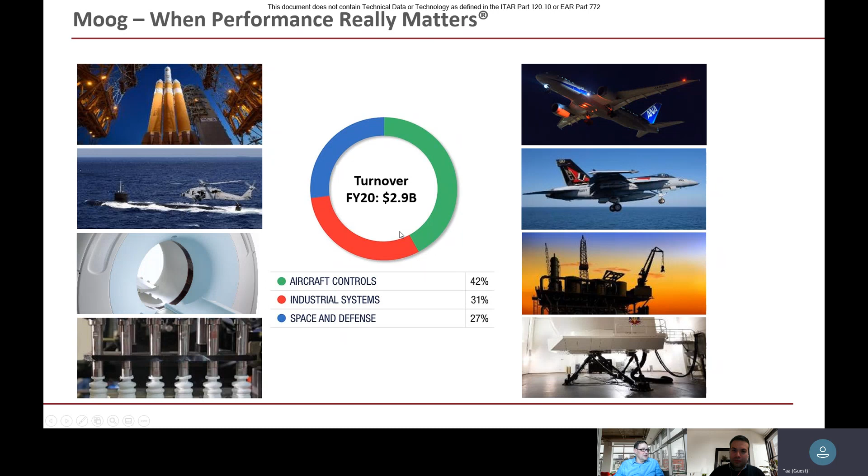So Francesco, why don't we introduce ourselves? Probably you would like to start. Yeah, definitely. Francesco Mazza, Business Development Manager for the Growth and Innovation team here in Europe. I'm an engineer, mechanical engineer, even though I've spent all my career more in business development.

In different sectors, I started with automotive and then moved to energy, renewable resources, and now more in motion control. I've been working in Europe in different countries - I'm Italian, but I live in the Netherlands. I had considerable long experience abroad of Europe too, in South Africa. If you look at my career, I started more as a sales engineer, then moved to product manager, and then to business development manager.

Ari, you want to tell us something more about you? For sure. So my name is Ari Almqvist. I'm the Group Vice President, and nowadays the Director of Growth and Innovation. I've been at Moog more than 30 years in different roles, starting in Finland. I've been in Europe in different roles and locations, basically Germany and the Netherlands, and the last 7 years I've been working in the US. My background is automotive engineering, I also have some education in aircraft business, plus some business education in addition to my engineering background.

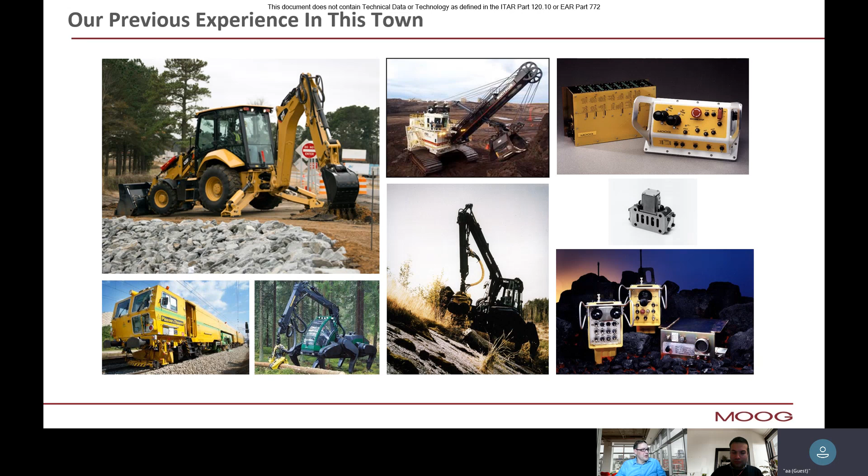Some of these machines are automated, some are pretty futuristic, some are quite high productive, and some are remote controlled. If I take my own working experience in Moog, when I started in Finland, I probably spent 70% of my time in mobile equipment, so that was the biggest market for me at that stage. So it is not that we are completely new, though I'm sure we are bringing some new experiences to this market. So next let's talk a little bit about our vision and the road to 2040.

Until now we've talked quite a lot today about energy efficiency and electric systems. We probably have tens of thousands of these systems made already, which we are showing some examples of today. Francesco, why don't you talk about what's going on now in automation and electrification, just so we show we're really working on the vision. It's not just sitting and dreaming, we are doing real work, trying to get our feet on the ground.

First of all, on the electrification side, we are working on making machines electric. Our goal is to even check the possibilities of full electric machines, so not only electric powertrains but also electric actuation systems, in order to improve the performance of the vehicle and decrease the energy consumed.

We are already developing several prototypes and some pre-series of different vehicle models in 2019 and 2020. We have already checked these vehicles with end users to understand if they feel comfortable driving and controlling a new machine, and we got quite a positive answer. In the next couple of years we are going to scale up production of this vehicle.

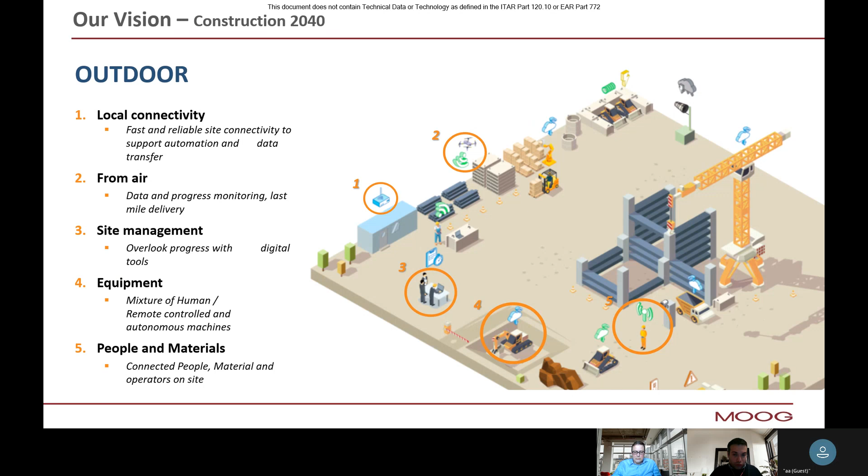In terms of features, we're imagining fleet management and material movement being regulated by data. Ari, do you see it the same way for indoors as well as outdoors? Yeah, I think we're also starting to look more at the indoor side, and it's probably the same topics: autonomy, electrification, connectivity. That's also happening inside.

I think we can envision more robots coming, some walking, some wheeled, doing specific tasks to support people in their work.

That is going on. We are probably not that far as we are in electrification. We are preparing technology to support that, but we see the role of robots, probably even some type of inside drones to map what's going on and the progress, and also moving material, with more of the wheeled equipment. That is probably what is going to happen. It's still probably more vision here, some of the areas we are working, and sometimes working with research institutes to paint the picture of what the future is going to look like. Is there anything you would add here, Francesco?

I think it's a pretty clear picture that you've mapped. The only thing I'd like to add is that we are really trying to play with the different actors of the ecosystem, and we really want to understand the pains and challenges of the end users - the construction companies - and what we heard from these companies is that there's going to be quite a considerable lack of qualified labor for construction in North America and Europe.

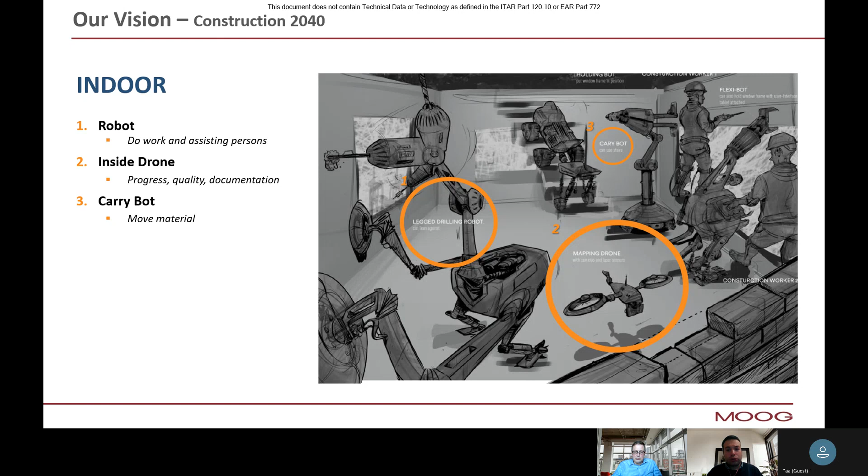This brings the need for a higher level of automation and a solution to support humans on this side. Talking about other towns and learnings from elsewhere, I think some engineering topics we've learned from nature - watching how birds are flying - and I think that was some of the ideas where people say, why don't we put winglets on the airplane to make it much more efficient, reducing drag to lift ratio. And some of the tools, learning also from nature - we're applying the same principle here.

If you look at some of the machines we've done in the past, an example is the mobile material movement here - even the equipment looks quite different. I think that's also an advantage we have, that we can basically take some of these designs using similar qualification, and use some of the technology more or less one-to-one inside and put it into mobile equipment, which probably has different challenges from a cost point of view and other things. But there's a lot of areas we can translate from other learnings to this market, and that gives us agility and speed doing this work with our customers when we're collaborating.

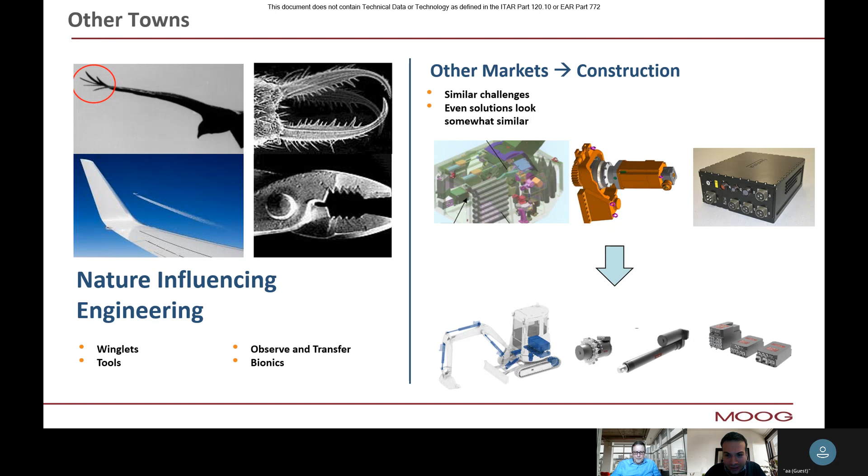Yeah, here we're talking more about energy efficiency, a lot driven through electrification and the power on demand. Plastic machinery, either injection molding or blow molding, a lot of things have gone electric, at least in a certain size of machines, and it has a dramatic impact on noise level and energy consumption. In defense, there are examples where you've really gone from hydraulic actuation systems to electric systems - much more efficient systems, also very reliable, easy to store and bring back into use again. So that's one of the advantages.

Aircraft are also moving to electric flight controls, slowly but surely. We know that hydraulics has pretty high reliability. It needs to transition through electric, and that's - go ahead. Sorry, I've lost you for a second. Go ahead. So that's also happening, qualifying them, and again, same thing - more electric, more efficient, less maintenance.

Flight training is using electric motion bases too. Even these motion bases, sometimes the payload being moved, still around 1g acceleration, can be up to 25 tons. So it's amazing what power you can nowadays achieve. And if you look at this technology, it's typically digitally controlled - that's what it brings. It's pretty easy to typically put closed loop controls in, very high efficiency through permanent magnet motors, and we can also optimize the actuation devices for different kinds of applications.

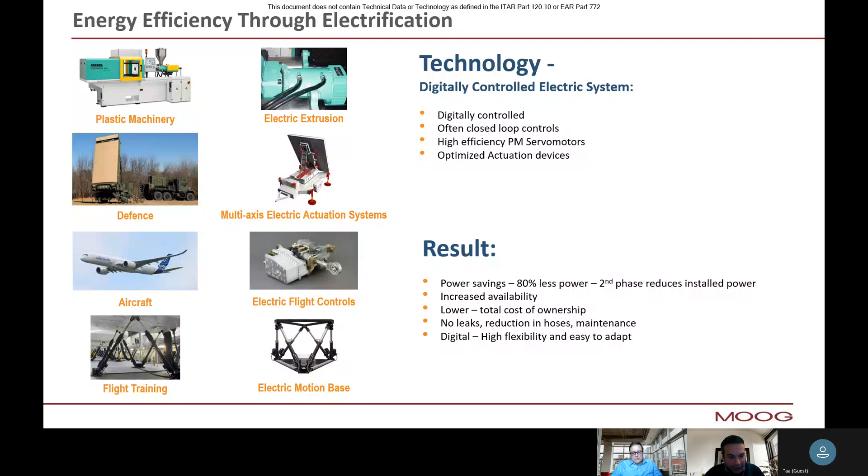That is probably another topic extremely relevant as well. In general, I guess energy efficiency, as we can see from the next slide, is an extremely key topic for the next trend, the trend of zero emissions.

I think you mentioned the zero emission. Probably you could talk a bit more further, because the amount of energy you have in your system is somewhat limited. So you need to work to reduce the energy consumption, and it's much more critical than it has been with internal combustion engines, because with diesel you have a lot of power source. So why don't you talk, Francesco, a little bit about this, what we've seen so far?

Absolutely. Going to electric with electric batteries, moving the construction machinery, needs a certain level of energy efficiency of the full machine architecture, because as we all know, the energy density of a battery is much lower than diesel, and consequently we have to create some form of efficiency.

This is happening in different sectors, I would say. In aircraft, there is this movement to electric batteries as well.

What is this bringing to the sectors, Ari? I think it has a lot of advantages, because you can have different use cases where emissions are limiting the usage of combustion engines. I think also you can reduce the noise, which is actually making the working environment much better. Also, the energy cost is going to be dramatically reduced, and in most cases we can provide better performance. So it's not just that we're excited to put a battery and replace a few motors.

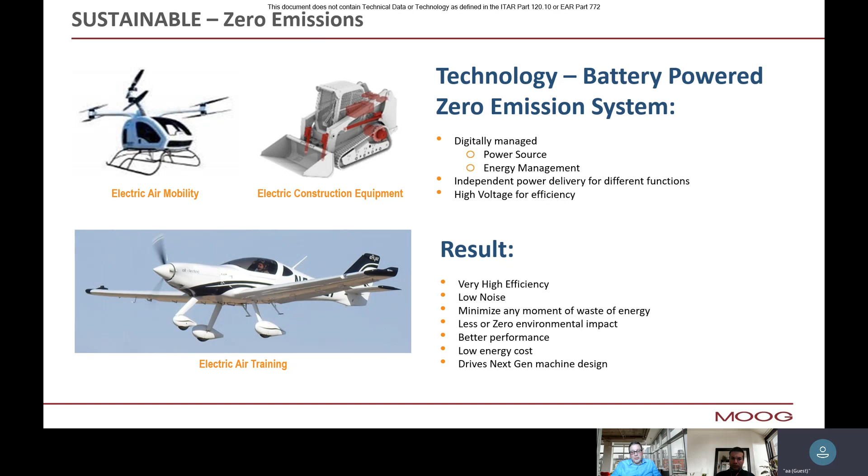The nice thing we really like is making it better performing and actually automation ready. So it's pretty easy, as you mentioned earlier, to add some automation capabilities. The technology is there. When you design the machine, you can use this disruption as an opportunity to think about machine stiffness and other aspects, so it's ready for automation from a machine design and structural point of view. Because as we've seen, when you try to automate these machines more, the machine structure needs to be prepared for that.

So why don't you talk a little bit about what we can do to help users and enable different use cases? What we're trying to do, related to remote control, is putting at the center of our focus the safety of the operators and the productivity of the machines. We're trying to improve the safety of the operators, because as we know, sometimes construction sites can be particularly dangerous. So how do we do it?

We would like to put the operator outside the cab of the machine, and from there be capable of controlling one vehicle, or eventually at a later stage, more vehicles at the same time. This will also bring a higher level of productivity of the vehicles themselves. How do we do it? First of all, it's a road in this case too, with a different level of automation that we're bringing to the vehicles. What's the first step, and what's the next step, that you see in this field?

First of all, we can use the technology we have to control the chassis automatically, which makes the difference. Take me, for example, I'm not an expert on the excavator, and typically it's taken months to get somebody able to use this kind of complex machine. They need to operate 14 axes to be able to drive the machine. I can sit in the cabin, and in 2 minutes someone tells me how to push the joystick, and I'm ready to drive. And actually, I'm driving better than an experienced driver can do manually. It's safe because it's monitored.

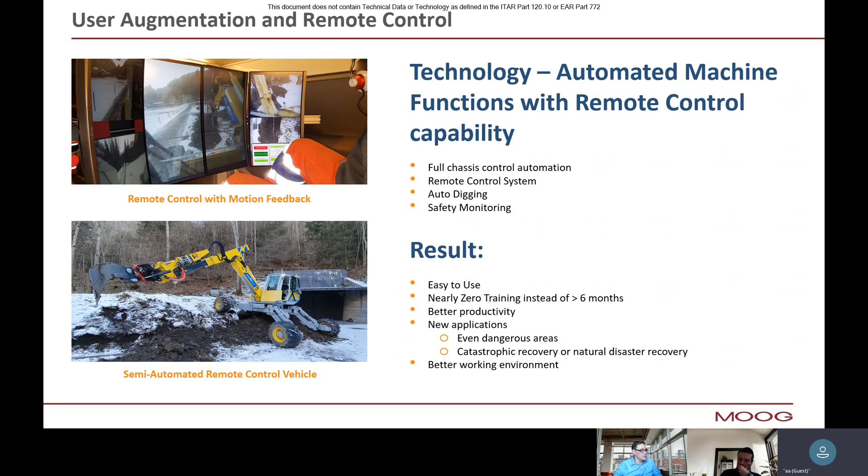And sometimes with some of these works we also work together with universities. So this leads actually to autonomy, and probably that's something you want to talk a little bit about, Francesco. What is happening within Moog about autonomy?

In Moog, we are doing several prototypes related to autonomy, several machines running in the fields of construction sites and agriculture sites, in big orchards, huge orchards actually in North America, where we are experimenting with complete autonomous vehicles that are capable of geolocalization and navigation with several sensors, in order to perceive the reality and perceive a change in the environment where they are operating.

So these vehicles are capable of detecting obstacles and also reacting to the presence of obstacles, in order to achieve the goal and do the job that has been asked of them.

Big advantages of these machines: first of all, they will be capable to work 24 hours a day, 7 days a week. And actually, we are thinking how to bring this into extremely dirty and extremely difficult environments. Any example of this environment, Ari?

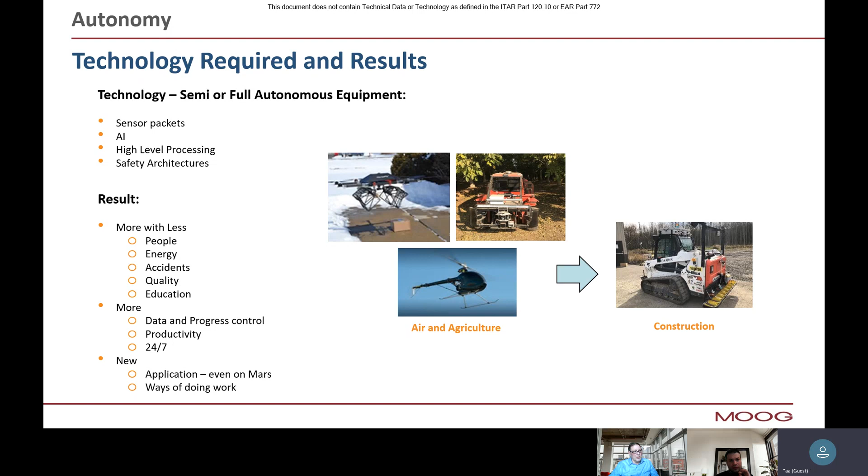Thanks, Ari. So I think I'll probably continue a little bit with cybersecurity here. I think this is probably a critical topic, and we will also ask for a few words about that. I'm not going to go too much into details here - if there's really a stronger interest, we are happy to create a separate presentation with our experts who are working on it.

But I think it is like everything else - when you want to make something safe and working well, it needs to be well thought out. So it starts with the design and the architecture - what you do on the machine, how your edge device on the machine is going to look, who has access, how you control the access, what is the access locally, what is the access through the air. All these things need to be well thought through. We have a bit of an advantage here because we have done similar kinds of things in industrial applications too, where you control who has access to what.

The connectivity is the next stage, how you create the secure connectivity. That's also probably where you partly need to rely on your partners to help with that. We are not the connectivity or mobile connection experts, but we can define what we need and want, and how we create that safety so nobody can disturb it. And if they can disturb it, they can't access any of the equipment, either on the edge side or on the cloud side.

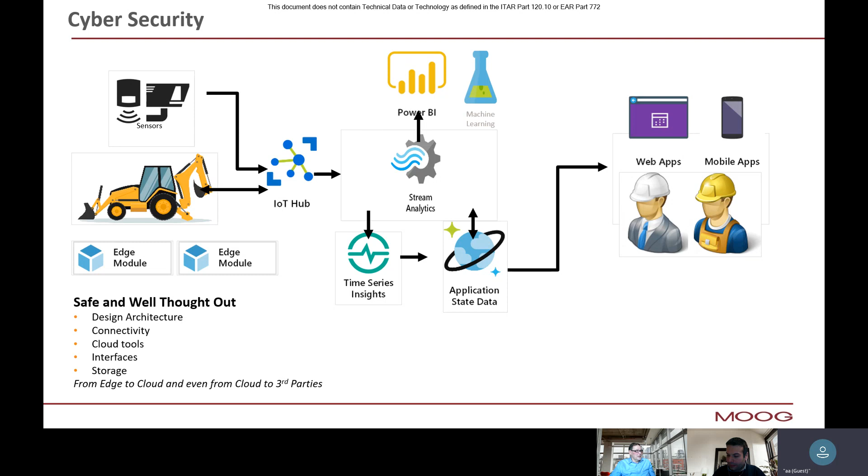And of course, then we use some of the machine learning here. So this is kind of what is going on. It's going to be evolving, it's going to be a development, but I think we have a pretty well thought out concept. And as I said, if there is more interest to go deeper, we are more than happy to create an extra presentation with our experts about that area.

So I think there's a lot of transformation happening here, and to enable this transformation, would you, Francesco, give some of your thoughts? What do you think is needed to make a transformation really happen?

Three pillars. The vision. The vision is extremely important, so we have to first of all imagine where we want to go and then take action to arrive there. But the vision itself is not enough. I think it's important to have relevant experience, tested technologies and capabilities developed in place.

And still there is a second big pillar that the vision relies on, which is collaboration. Our team collaboration, in our case we're talking about around 5,000 engineers working in different environments, in different sectors, but still trying to bring the best solution and learning from different fields and applying technologies from one field to another.

But collaboration is also a bigger word. It's not enough within one own company. If we are here today, it's also because we believe in the power of the ecosystem, in creating connections and bringing each other experience and building capabilities for each other.

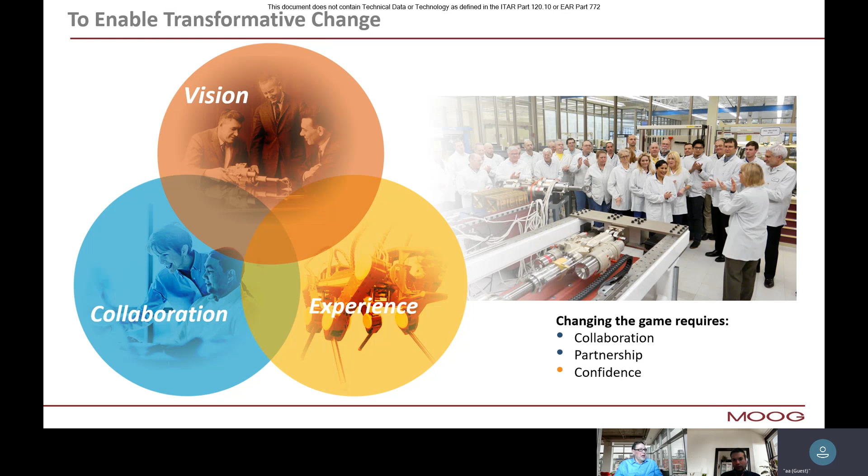So I agree with you, and I think all this together is a bit of our vision statement: making impossible possible. You can't probably change the laws of physics, but you can push the boundaries when you have the right people, right technologies, right experiences. In many cases, we have made things which people didn't believe was possible.

And as I say, this is where collaboration is also important. In many cases we have done it together with our customers, working closely together to put really good solutions together. So at Moog, we like challenges. It is when performance really matters. We want to make better machines. That's our vision.

So now it's probably time for questions and answers. Yeah, we've been a little bit longer. If I look at the time... 56 minutes. No, but that was... let me stop. I think we have been a little bit long.